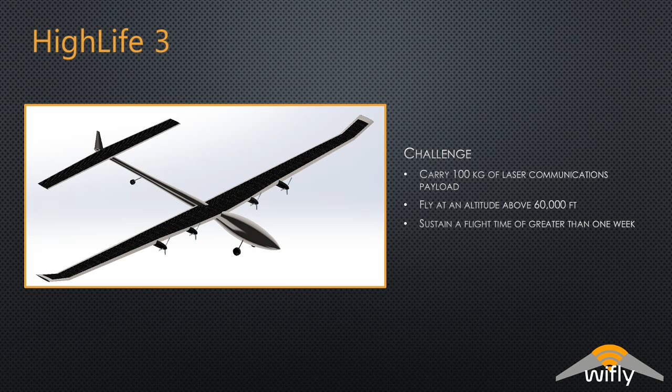As far as team structure was concerned, I myself served as team leader, with Alice Montague and Jonathan Leeper in charge of CAD and graphics, Blake Baber serving as capture manager, and Tyler Hines as a configurator.

For the rest of the team, we split into sub-teams, with Steven Ziske in charge of propulsion and power, assisted by Tyler Hines, Alice Montague, and Blake Baber. For aerodynamics and control, we had Nick Nelson, assisted by Molly Crow and Jenny Weiner. Charlie Johnson took the lead for weights and structures with Jonathan Leeper and Tyler Hines, and for systems, avionics, and ground support, we had Jenny Weiner with Molly Crow and Alice Montague.

The high-altitude, long-endurance aircraft will be required to carry a 100-kilogram laser communication system. This aircraft will allow the communication system to send and receive data over a relatively large terrestrial area. In order to achieve the desired coverage area, the aircraft will need to fly around 60,000 feet. It will be required to utilize a standard runway for takeoff and landing and must be able to sustain a flight time greater than 1 week.

The idea driving this concept is its utility as a low-cost option to satellites and the ability to change its operational area as the stakeholders see fit. By incorporating innovative propulsion and design strategies, this aircraft will be able to remain on location without need for scheduled maintenance for up to 400 days. Its low weight and high lift-to-drag ratio will allow this craft to reach its target altitude and cruise with minimum power expenditure.

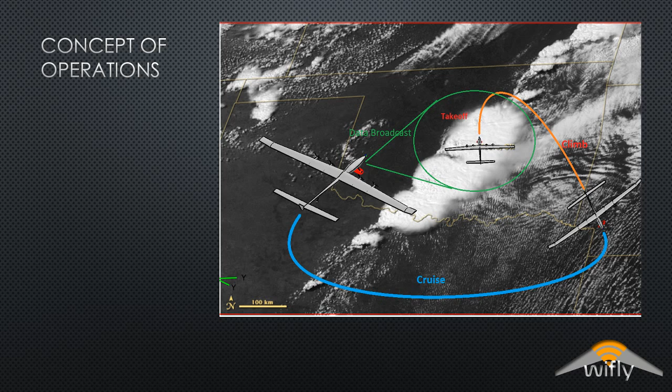A detailed aerodynamic analysis was performed to analyze the merits of our high-altitude, long-endurance vehicle design. Our aircraft was required to fly to an altitude of 60,000 feet or higher and cruise there for long extended periods of time, for say over 1 week or more. Now to do this, we really seek to maximize our range and endurance.

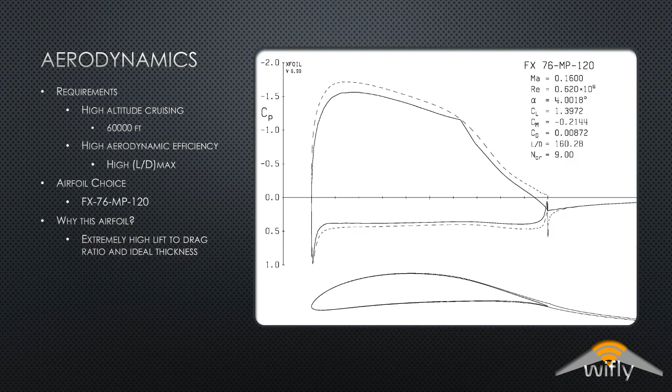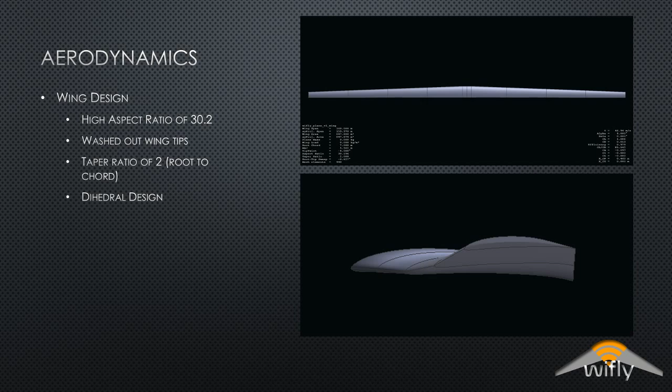There is no sweep on our wing because we're flying at low Mach numbers, approximately 0.16. And the taper ratio of 2 was chosen to further decrease the induced drag at the tips of our wing. And a slight dihedral was implemented. It really serves to balance the bending felt by the wing due to its enormous aspect ratio, improve stability, and also give more wiggle room between the ground and the wingtips during landing procedures where the bending might be most prominent.

For 3D aerodynamics, we looked at 2 cases, the wing and the whole aircraft itself. For the 3D wing, we conducted an XFLR5 simulation. As you can see in the figure to the right, the parameters outputted are shown below. Our cruise angle of attack is 4 degrees, with a wingspan of 160 feet and a wing area of 848 feet squared. The aspect ratio, as said before, is 30.2, and we obtained a lift-over-drag ratio of 79.1 for the wing. This corresponded to a low drag coefficient of 0.013, which is almost equivalent to the induced drag coefficient of the entire aircraft itself.

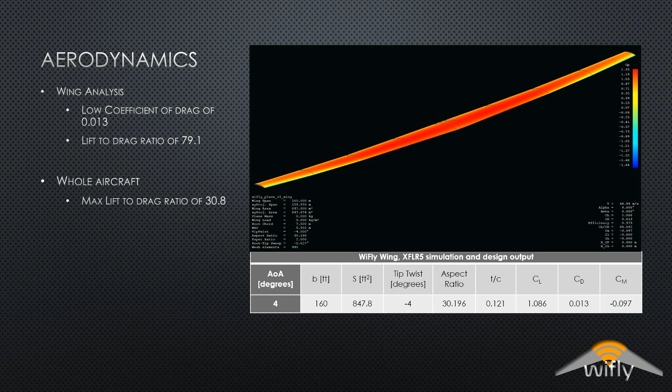Now for the entire aircraft, the max lift-to-drag ratio obtained is 30.8. And when we actually calculate it using the equations from Brandt et al., our operating lift-over-drag ratio was 30.59. So essentially, our aircraft is operating at nearly max efficiency, and so we really couldn't have done any better in that regard.

The plane is fitted with high-efficiency solar panels that are developed by Solero. These solar panels are paper-thin, super flexible, and are incredibly efficient at high altitudes. In 10 hours of sunlight, our solar panels are capable of producing enough power to fly the airplane and charge the batteries for 15 hours of flight time during the night.

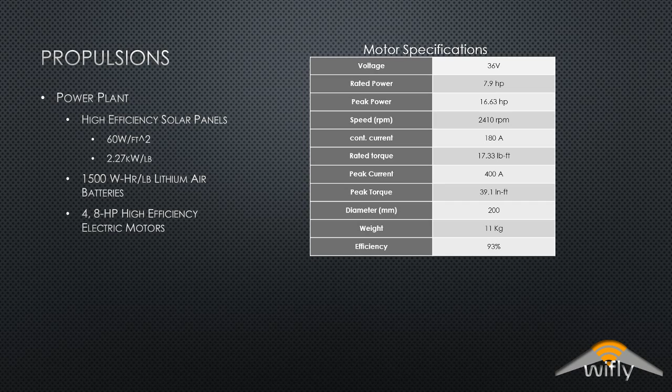The batteries on HighLife 3 are lithium-air batteries developed by the University of Tokyo. These batteries have 9 times the power density of current lithium-ion batteries and 7 times that of lithium-sulfur batteries. The 4 electric motors on the HighLife meet all of the thrust and power requirements needed to keep our 2,500-pound plane at altitude. The motor specifications can be seen on the right. The motors are lightweight, incredibly efficient, and small enough to not create a lot of drag.

The lifetime of the batteries used on the HighLife 3 is recorded to be 2,000 cycles. Before 2,000 cycles, there are negligible changes in the voltage output. This means that the batteries on the HighLife are capable of lasting around 5 years. If the batteries are producing power at less than ideal rates, they are easily accessible and replaceable. With easy maintenance in mind, the batteries are directly accessible through access panels located along the underwing of the plane for troubleshooting or replacement. To achieve max performance from the batteries, the storage compartments will be insulated to ensure that the batteries are in ideal temperature conditions for power output.

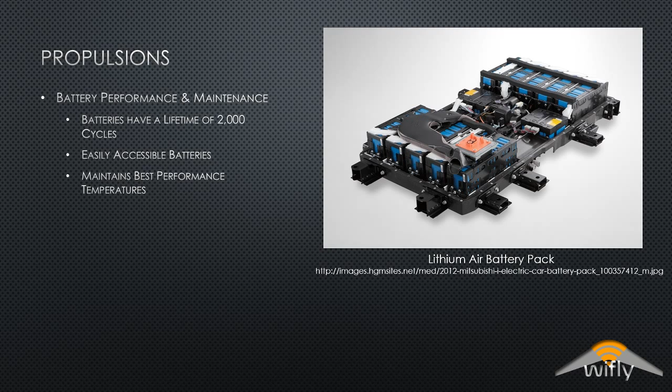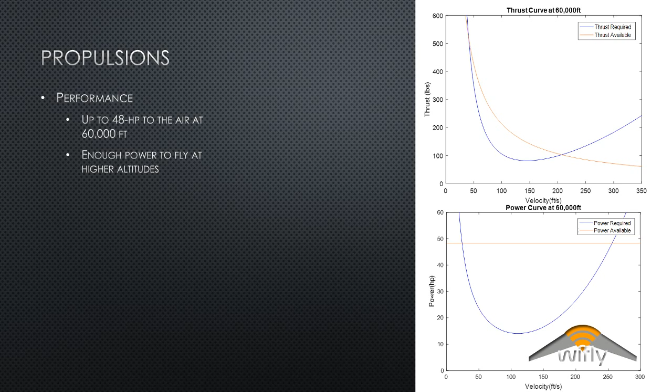At 60,000 feet, the plane is able to produce 48 horsepower. This creates enough power to reach a maximum altitude of 70,000 feet. During the day, the plane will fly up to 70,000 feet and then coast down to 60,000 feet during the night to use as little battery power as possible.

The blades used on the 4 motors are capable of having an efficiency of 80% at 60,000 feet. With variable pitch props, the propellers are capable of reaching this level of efficiency from all ranges in between 0 feet and 70,000 feet. This high efficiency makes takeoff, landing, and gaining altitude a breeze.

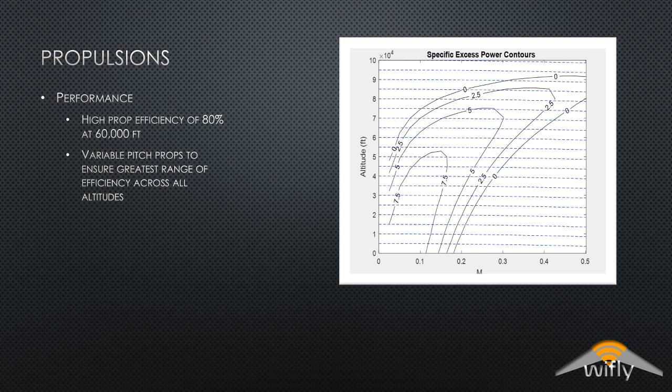Or 2,000 pounds. We are currently at 1,800 pounds, which puts us underweight, which allows us to carry a little bit extra in batteries and solar panels, which is a huge benefit for us. The other aspect is that our structure doesn't have to support anything extra, no other materials and stuff. It only has to support the mission payload and no other changing loads such as water or fuel.

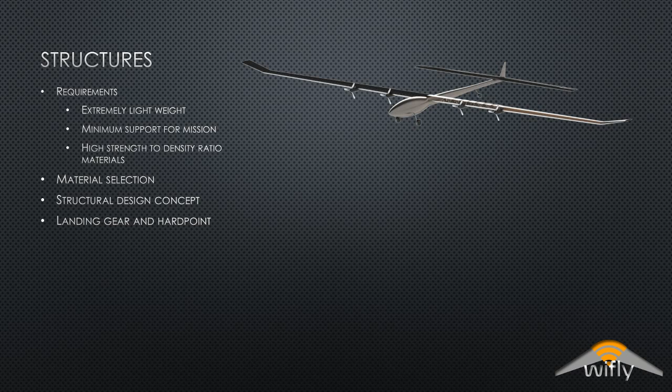The material we selected for the major structural components of the aircraft is aluminum 7075-T6. It's commonly used in a lot of aircraft. It's a very high strength aluminum, while also having a great strength to weight ratio. The downside of it is it doesn't show signs of fatigue very well, so inspections of the material have to be done very regularly and very carefully and thoroughly.

The other material is steel 1020, mainly used for its easy machinability and other properties such as that. The last two materials are carbon fiber composite, used for its higher strength in conjunction with the honeycomb, giving it a much higher strength in our wingtips and other portions of the wing. The fiberglass composite is used for our skin, just for its extremely lightweight and ability to be smoothed out quite easily.

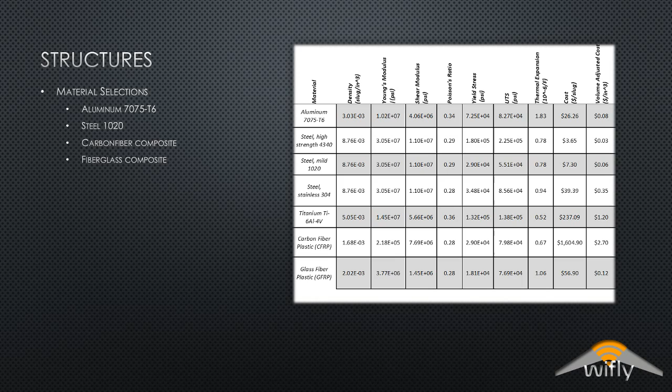The structural layout is pretty generic and standard. We have a general T shape of aluminum, providing the major shape of the aircraft. The wings are partially fiberglass and partially composite. The engines need to be supported by the aluminum because they're heavier. The rest of the wing does not, so it can use a lighter material and doesn't have to have a full aluminum beam going through it.

The wheels and landing gear and such are of course made out of steel to be able to support the entire 2,500 pounds of the aircraft. Also, the front landing gear is holding 94% of the weight, and the tail dragger is holding the other 6%. This allows for the aircraft to be picked up by the tail by 5 to 6 humans and moved around if need be.

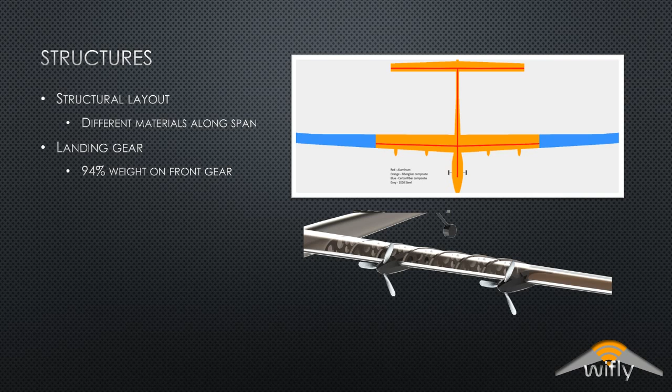This portion of our video will include systems and avionics. The component layout in the top picture will show the placement of each component, as well as the center of gravity, which is going to be affected mostly by the 100 kilogram payload, which will give us a center of gravity of about 18 feet.

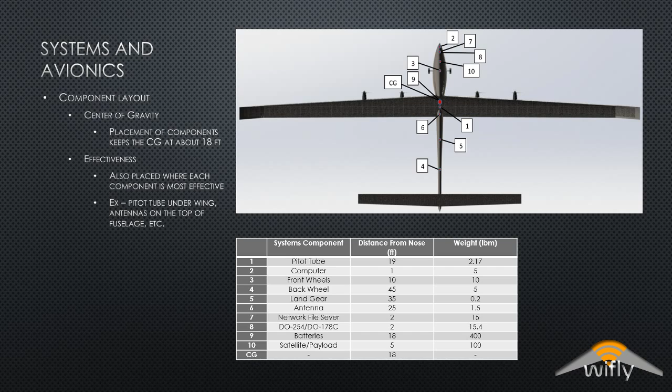We placed our components within the system according to our center of gravity and where we wanted our payload. As stated before, the payload design is going to be our greatest factor in this. At 100 kilograms and a 5-foot diameter, which will reach all the way across the fuselage, the computers will be next to the payload, and the servos and antennas will be further back.

The picture below shows the interaction of the components. The top row is when ground support is controlling it, the middle row is on autopilot. Laser communications will connect to the camera on the plane, then an encrypted storage system will prevent the plane from being hijacked, only controlled by the user, which connects to the mission computer that moves the servos, flaps, and landing gear when controlled by ground support.

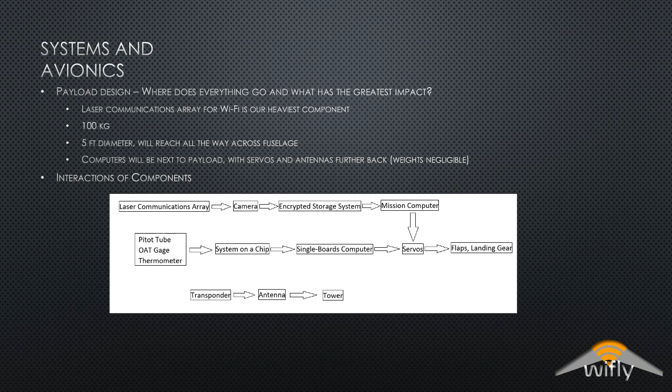On autopilot, the instruments will have their readings sent to a system on a chip, which will be connected to single board computers, able to control the servos that again move the flaps and landing gear. We will also have a transponder and an antenna that can connect to nearby towers.

As well as a transponder, we've included position lights and a beacon to climb and descend through regulated airspace according to FAA regulations for takeoff and landing.